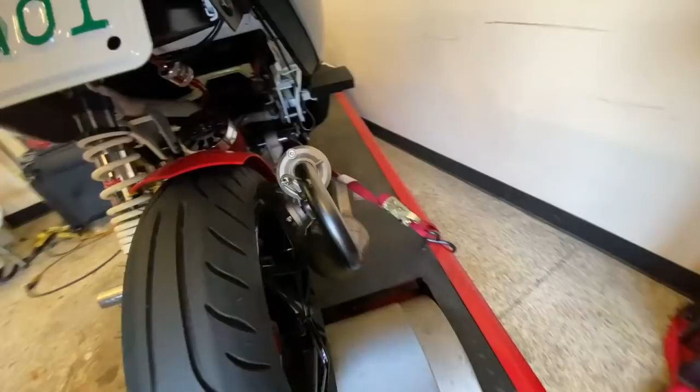So I'm back on this Zuma. I've been working on this thing for the past few days, and if you guys didn't see it in the other video, we talked about it. This is a 94cc Malossi, basically a crate motor that you put together, called the RC1. It's a really strong setup. We put down pretty decent power, 33 horsepower, last time we were on the dyno.

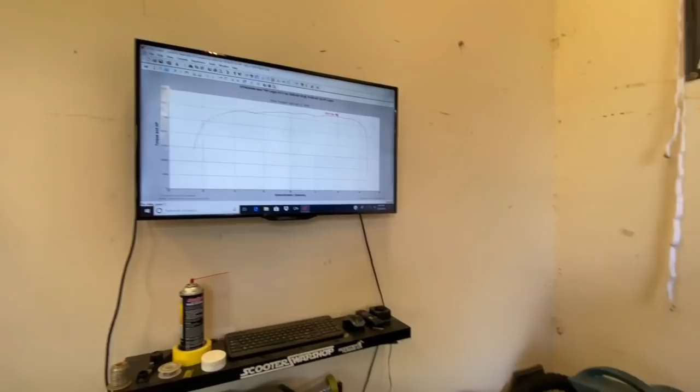Now I'm doing a little bit of tweaking, getting ready to make what I think is going to be my final pull. What we've been working on is not just peak power, but trying to get the acceleration down in the lower end a little bit sharper. It wasn't necessarily lag, but it just wasn't maximized. So I played with the CVT settings, changed some rollers, changed a little bit of weight in the rollers, as well as a little bit of ignition timing, zeroing it in. The jetting was pretty much perfect. He did a really good job putting this thing together, but it needed a little bit of timing work and a little bit of CVT work. So I think we got a really nice combo here.

So let's go ahead and make a run.

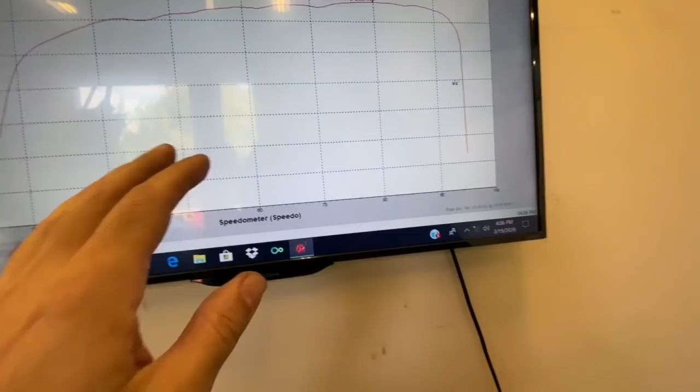That was nice, really nice, strong run. Let's take a look here. Get this graph going, take a look and see what we got. So we're still at 33 horsepower, which is good, that's what we want. But now we've got a lot more meat in the middle here. So here you can see down low. Let me shut the computer off.

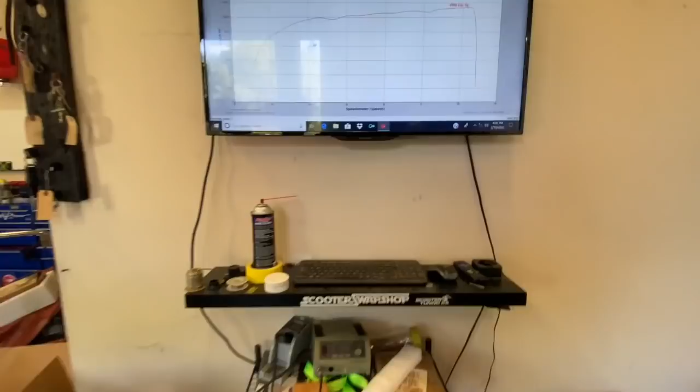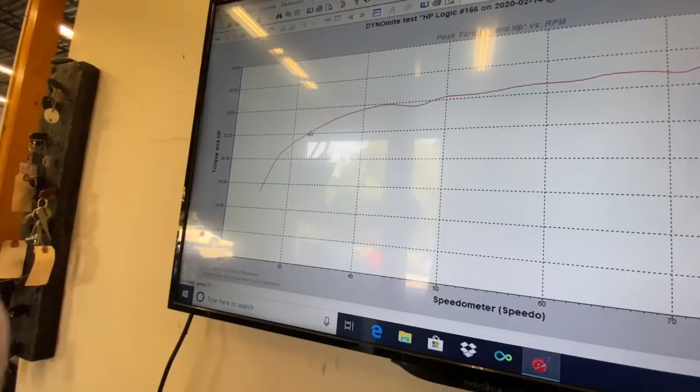So you can see the previous best run was 33 horsepower as well, but down low, especially in the first 30-40 miles per hour, you can see at 30 miles an hour it was only making 23 horsepower, and by 40 miles an hour it was at 29, and it kind of held at that 30 mark all the way up until around 60 miles an hour.

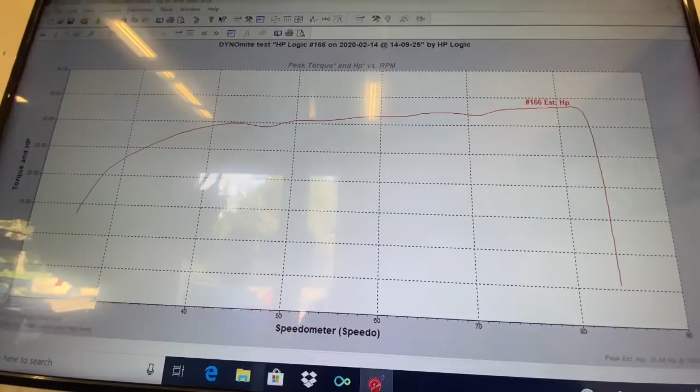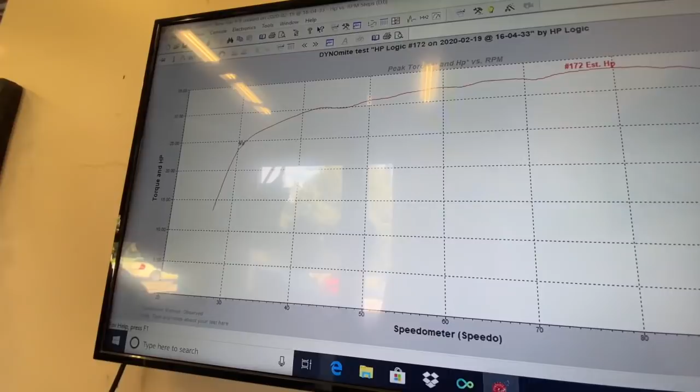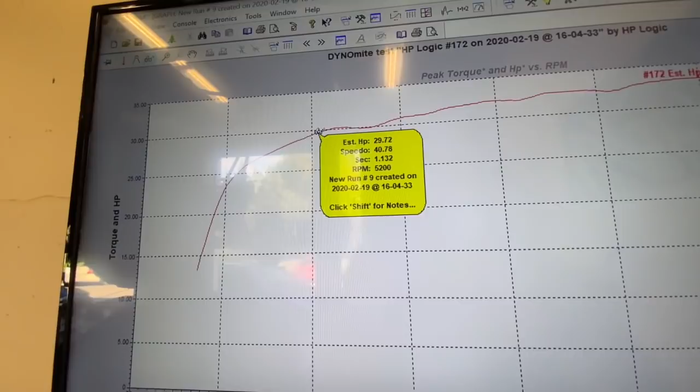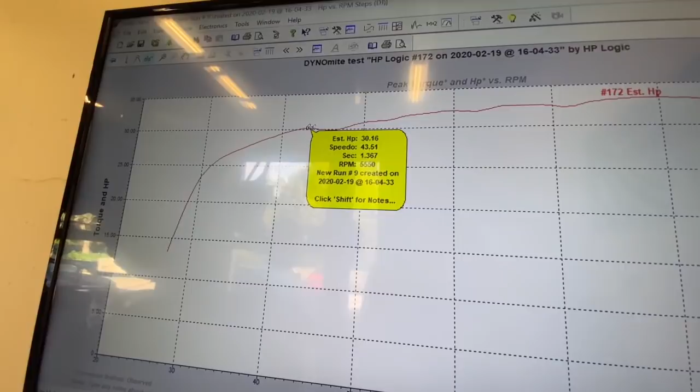But now if we take a look at the power gain with the last run, let's see here. Now you can see down low at 30 miles an hour, we're coming up faster and hitting 30 horsepower by 40 miles an hour. So a big difference there, and we're over 30, going right in, right here at 43 miles an hour, we're over 30. And it's holding a lot stronger through the mid-range and still climbing all the way out.

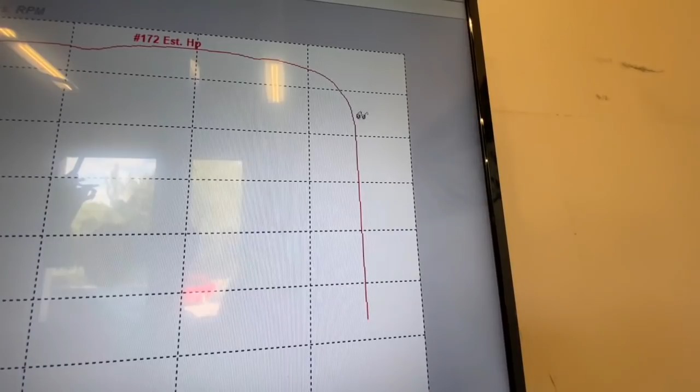This was 90 miles an hour and climbing. I stopped the run at 95 miles an hour, 94.5. So this thing can just keep on cranking. I wouldn't be surprised to see this thing go 100 miles an hour. I don't know if Pedro wants me to attempt that, but it definitely seems as though 90 is in the bag for sure. With that kind of power, I don't think that's a problem at all.

So we didn't really lose any top end at all, and we picked up 3 horsepower in the mid-range and low end, and that's going to make a significant difference in acceleration. You're talking about a scooter that made 3 horsepower stock, so that extra power is definitely going to be noticeable down low.

So I'm going to take it down. We'll take it for a couple of test hits and just see how it feels, but I think that dyno work is done.

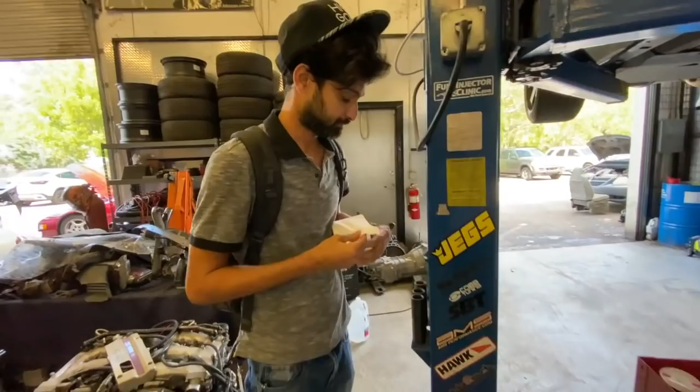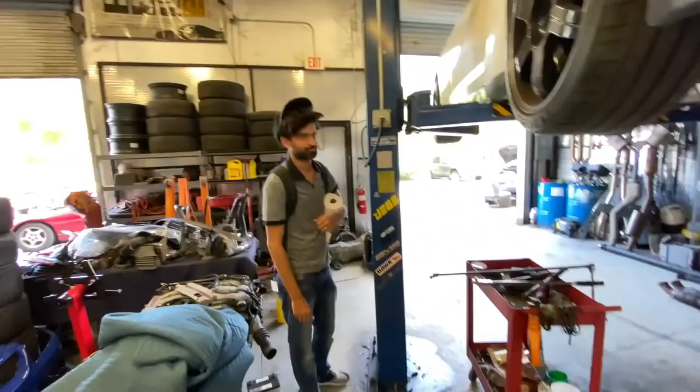Look at this freaking guy. He comes to work today carrying a freaking toilet paper roll because he's got coronavirus all of a sudden. I'm gonna die, guys. My chest feels really tight. No, Marcus is a doctor now. No, my chest is good. Am I breathing? Oh God, did you hear that? He's got water in his lungs. It's fine, he's pneumatic. Does that mean I can swim faster? Oh no, it means you can breathe underwater. This is good, you should try this. Well, swim in orange juice. I'm staying away from him. I don't need any of that BS because I got stuff to do.

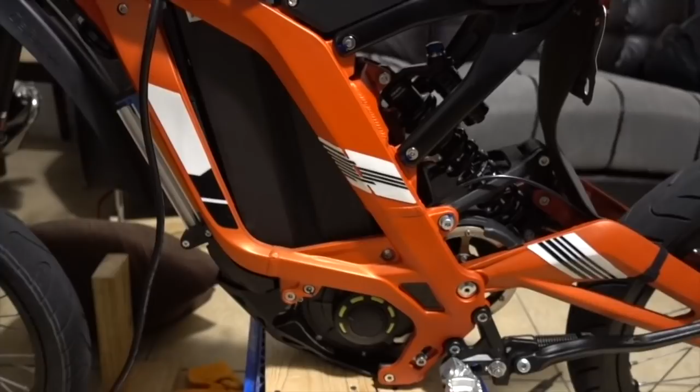I have the charger hooked up. You can see the lid just fits almost exactly like stock. It looks perfect, fits in there nice and snug. It's not going anywhere. And there's some really good tech in this.

I'm going to show you guys, give you a little tour. So we've got the connector here. This is a factory style connector. You're not going to spark, shock, or zap anything with this connector. It's just like factory.

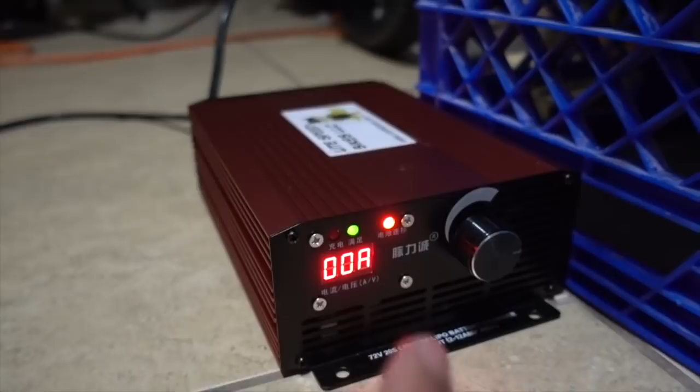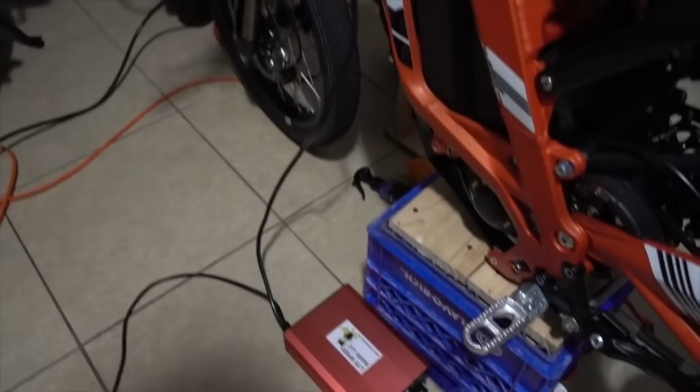This is the charging lead right here, so we're using a different lead for charging. And it goes down to this charger that's adjustable. Right now, I have it set for about 12 amps max, and it's already charged. When it finishes charging, it drops down to 0 and just maintains. So, really nice charger. And then the BMS is built in.

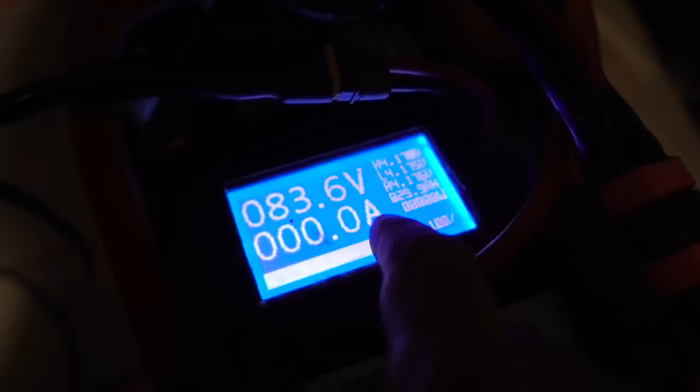This is a 300 amp BMS that's built into this, and it's got this cool display screen here that energizes and has all your information right here. So you've got your percentage bar, your current voltage, your output or input current depending on what's happening. It also has wattage right here, and different cells so you can see what's going on there.

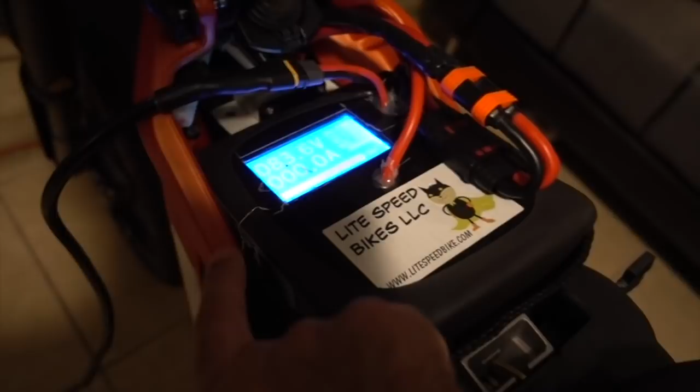So you can see, full charge, we're just below 4.2, so we're at 4.17. That'll be good for the cells, it's going to keep them happy for a long time. And that screen basically gives you all the information you need.

There's also another little piece of tech that goes on top of that. We're going to do a full detailed explanation and a review of this battery. So call this a teaser.

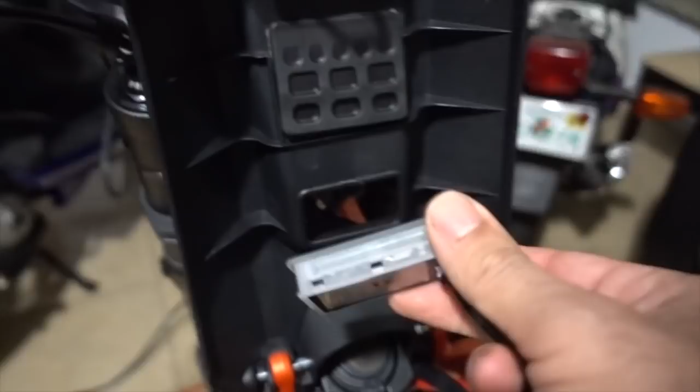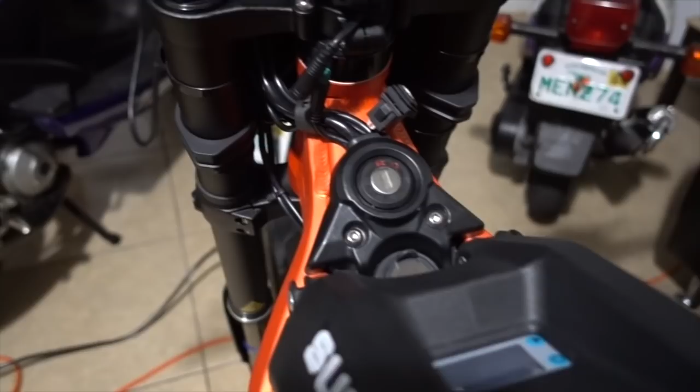Here's the other piece that goes on there if you want. Focus, there you go. So this little screen fits perfectly where this hole is. So if you want the factory look, this thing goes in there really nice and can fit just like that and give you a nice readout also.

I haven't decided if I want to use that yet or not, because with this lid closed I can see into the battery here. I'll show you. So with the lid closed down, you can see all the information right there. So it's really up to you.

You have choices. These are all custom made. These batteries are custom made by Chris at Lite Speed, and he does an amazing job. This battery is in a fully polycarbonate shell. It's potted top and bottom, and it is a nice upgrade.

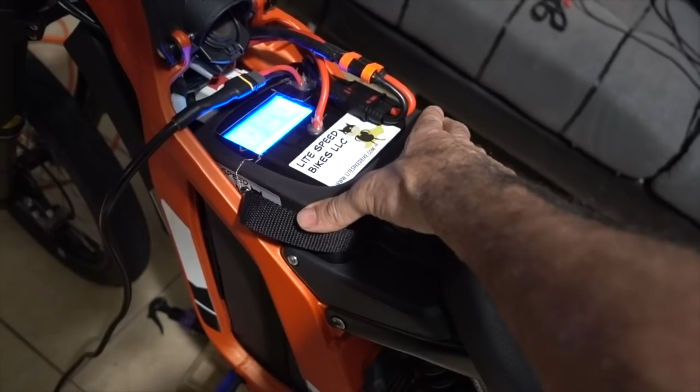We're going to see 200 plus amps out of this, and hopefully 80 miles an hour out of it, that's my goal. I want to see 80, at 72 volts. I don't see too many people doing it, and if they are, they're not showing it. So let's see what we can get.

Like I said, a really robust battery. Looking for a little bit of a bump in range for commuting. I was thinking about just keeping the 2 batteries so I can swap back and forth, but I really think I'm just gonna go gung-ho with this.

I rode it home with this battery, not charged all the way, and I just blasted it a little bit on my way home, and I'll show you what we got. Just cruising. This is a teaser, so don't think this is the end. I'll tell you that right now.

So on the way home there, 73.6 GPS, just a little quick blast. We're not dialed in yet, so 80 is on the way. I'm very sure of it now, considering what I saw out of it just cruising home, not fully charged. So get ready for that.

This is gonna be a pretty wild setup. The acceleration, I'm hoping to see 0 to 60 down below 4 seconds, 0 to 30 down below 2 seconds. That's what I'd like to see. So the power is really good. I can tell you that it wanted to do wheelies from like 40 miles an hour, which is crazy to think I'm on a freaking electric bike doing that.

So stay tuned for more. I'm really amped up, pardon the pun, on this whole setup, and I really hope you guys are too. So new batteries here, we are ready.